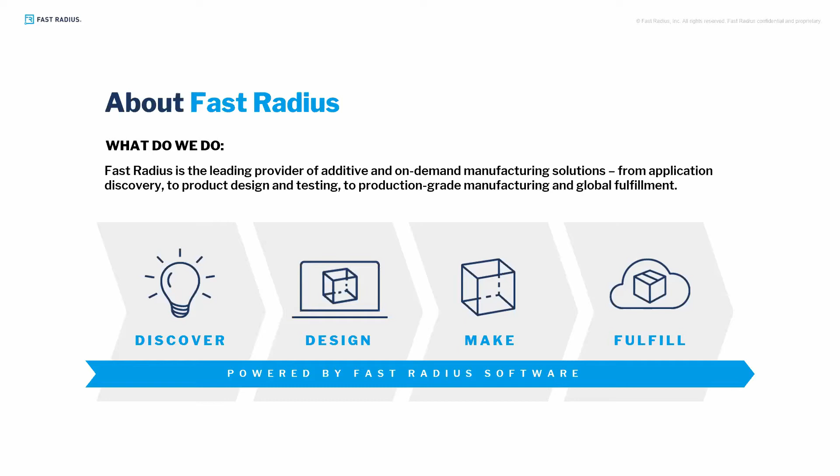So who is Fast Radius? Well, we're the leading provider of additive and on-demand manufacturing solutions, all the way from application discovery to product design and testing to production-grade manufacturing and global fulfillment. We're able to work across the product lifecycle, whether it's finding applications by working closely with companies in the discovery phase, to creating a robust fulfillment strategy that reduces waste and inefficiency.

So what does that really look like? Well, it can look like a couple different things. It can look like a one-stop manufacturing innovation solution provider that partners with an electric motorcycle company to find the right manufacturing solutions. That means finding the right process for each part in the BOM on a case-by-case basis and providing one solution that enables agility and speed.

It also looks like providing prototyping through full-scale production for a robotics company looking to develop a new product in half the amount of time as before and reducing their risk at launch. It also looks like completely rethinking existing supply chain fulfillment solutions to reduce costs, improve response time, and keep airplanes safe and in the air all around the world.

We're exceptionally proud of what we've been doing and building here at Fast Radius. In 2019, we were recognized as a World Economic Forum Lighthouse site, which honors companies and manufacturing firms that are implementing Industry 4.0 technologies. At Fast Radius, we're implementing end-to-end digital thread processes and the latest in technology and automation to create efficiencies and improve outcomes in manufacturing.

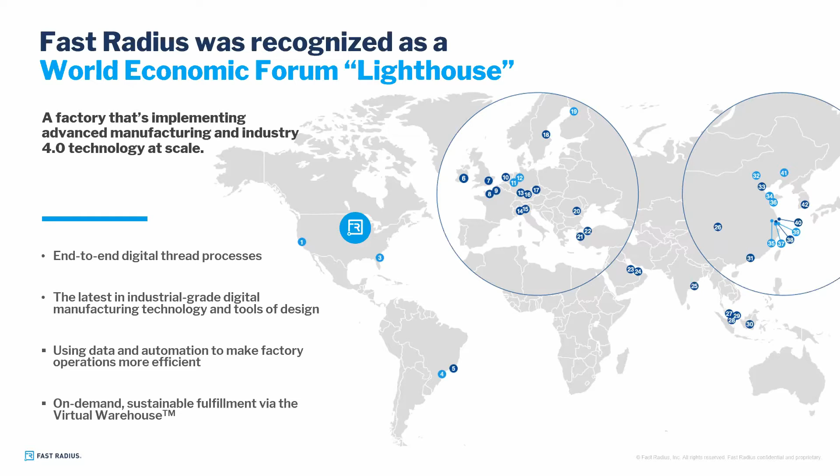Today, we support on-demand fulfillment solutions through our virtual warehouse, which enables our customers to reduce waste associated with warehousing and ensure supply is more perfectly matched to the demand when it appears. I'll give some more examples of that later on.

So let's transition a little bit away from talking about Fast Radius and really talk about the topic at hand, which is additive applications. When we're talking with companies about where to find the value of additive applications, we see four key archetypes. The first one is make the unmakeable. Second, mass personalization. Third, spare parts and supply chain. And fourth, low volume production. So let's talk about each of these a little bit.

So make the unmakeable. I think this is a common example for additive manufacturing. And the example we have here is the Adidas Futurecraft shoes. So creating new geometries that were previously impossible, very high complexity parts, maybe high performing parts, or even parts, in the case of Adidas, that grow their brand halo, something that helps convey the brand in the market.

The second one is mass personalization. Another really common use case for additive is, instead of creating large SKU segments of maybe 10,000, 100,000 units, creating smaller SKU segments, maybe in the thousands, and going after smaller segments of the market one at a time. I think an extreme case of that is actually single unit customization, where a product is created specifically for a user. The sources of value here are that you can actually create revenue uplifts by segmenting the market and then actually enhancing the customer experience.

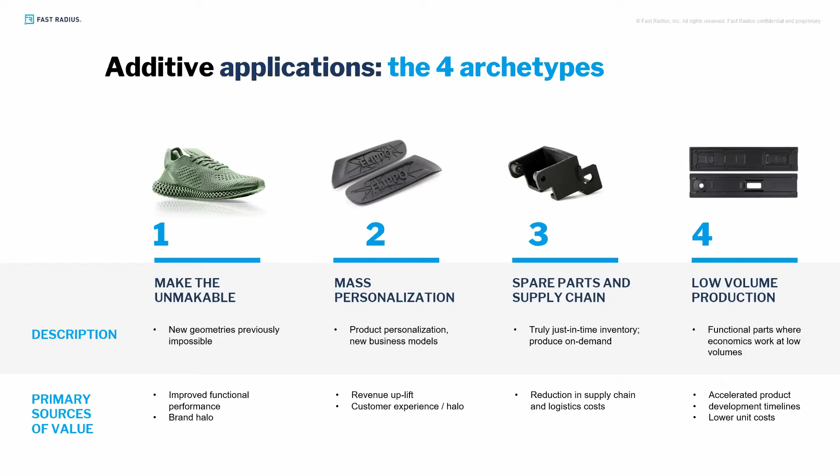So now that we understand the archetypes, how do we actually unlock the full potential of additive applications? How do we get the most value from these applications? So we actually see three main keys. The first one is understanding the economics.

Second is realize what's possible. And the third is embracing agility. So let's talk about key number one, understand the economics. So the first step to really unlocking the full potential of an application, it really starts with understanding the economics.

So additive can create much more value than a simple like-to-like part. And I think that's a big misconception, is that most people, when you look at the surface, making a part through additive, probably like-to-like, might be more expensive. But we actually describe the total value of moving to additive as something called the total value of additive, or TVA for short, which characterizes the value in relation to revenue increases and cost reductions.

So when we look at the revenue side, which is the top of this graph, we can create brand awareness with new and revolutionary products through brand halo, which I'd mentioned before with Adidas, is a really good example of that. We can also go after more of the market with incremental SKUs and even go to market faster in response to demand. Another category is increased functional improvements in which the customer is willing to pay.

For example, a $5 part through additive might increase the performance of a $1,000 system by about 10%. This allows the system to be sold at a premium. So that $5 part, yes, it may have gone from a $1 part to a $5 part, but you're actually increasing the value of the entire system through that particular part.

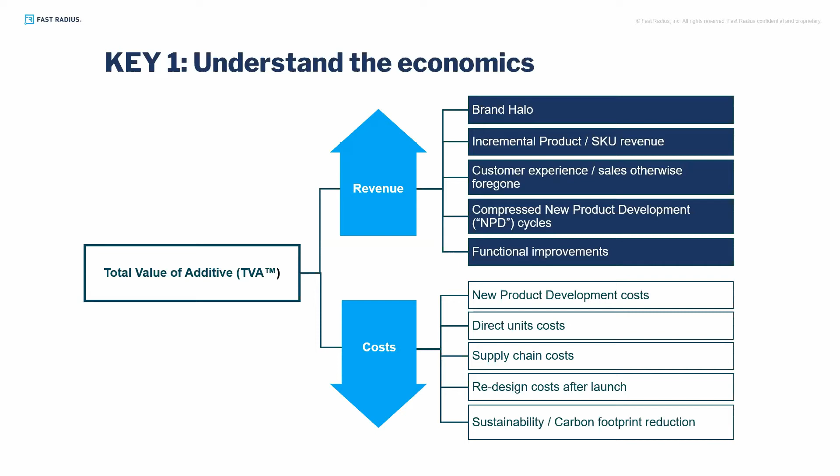As well as there are some cost reductions associated with sustainability and carbon footprint, where when we look at the differences between additive and subtractive manufacturing, there are cases with additive where you're actually using a lot less material. And so there's a lot less waste associated with that, which actually can reduce your costs. The reason this comes up as key number one is that in a business, if you're not driving value, it's very hard to get traction. And so it's really important that this is the first place you start when you're looking at applications.

Okay, so key number two, realize what's possible. So in some circles of additive, the term complexity for free comes up. And this term helps describe the trade-off between complexity and cost for a given manufacturing process. So in conventional processes, increasing complexity creates cost, where the additive curve is pretty flat.

And so a good way to think about this is I have a part with a lot of machine time associated with CNC. I think most engineers understand that the more time that it's going to sit on the mill, the more expensive that part might be. And so you might make trade-offs of your part of saying, I'm not going to add this extra complexity because it may not actually create more value in terms of the product, as well as their kind of competing effects.

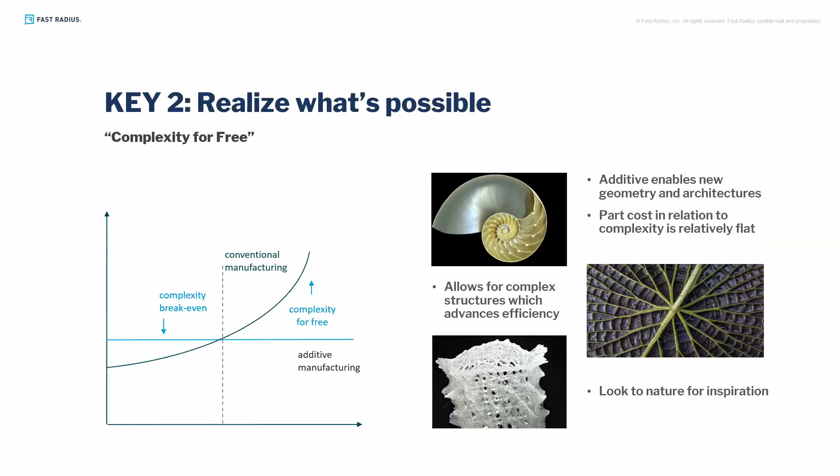And so related to this, if you look in the last 5 years, there's been a lot of advancement in the tool sets available to engineers, where additive manufacturing reduces a lot of the limitations of traditional manufacturing, like we just talked about, which allows these organic structures like lattices, which create these new aesthetics, which have the promise of new levels of mechanical efficiencies. The tools are not only built on the physical realization of the design, so it's the first time that we can really take these types of designs out of the virtual world and bring them into the physical world.

But the important thing to note is that the increasing computational power that's accessible to all of us makes these complex designs easy to manipulate. And so now you have software that can quickly converge on optimum solutions for different areas of the design space, where you get things that look like the parts that you see here.

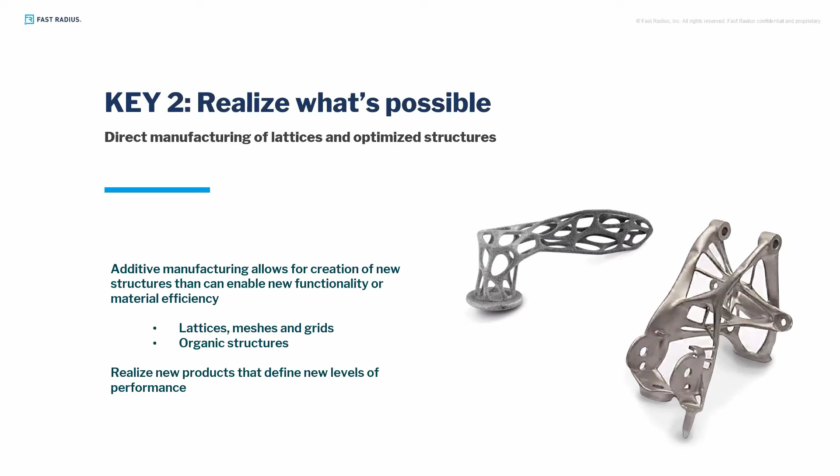And some of these may be more structured and visually or aesthetically driven. And some of these may be more structurally optimized. There are many different ways to talk about this family of design: lattices, meshes, grids, or maybe just organic, as I had mentioned before. The complexities of these designs have intent and purpose and can unlock new levels of performance.

So we talk a lot about the design, but another thing to note is that eventually we have to make these designs out of something. And so it's really important to note a big key has been advancing material sets. So wind back 10 years or more, and for additive manufacturing, there were probably only a few materials available. And really the key variable there was color. You could get the same part made in a couple different colors. And it was really driven towards aesthetic models, kind of non-functional.

When you look at today, there are materials that range from flight-ready Ultem materials to these soft elastomer materials that are biocompatible. There are also high-temperature plastics and cyanate ester, which is available through Carbon, which is designed for fluidic applications with really high operating temperatures. Or you could look at more structural materials like a PA12 glass bead, which is a nylon-based material that has glass particles filled in it to improve the strength and impact resistance, like a real filled composite.

And so these advancements in the material sets have a direct impact on the type of applications that engineers have access to. And a really good example of this are the EPU materials and silicone materials through Carbon. These soft materials, I think most people are used to the rigid materials, but the soft materials have opened up new dampening and energy dissipation applications by mixing the soft material response with things like lattices, which we just talked about. As more applications are found and adoption gains steam, you can expect these material sets to get better and more diverse over time.

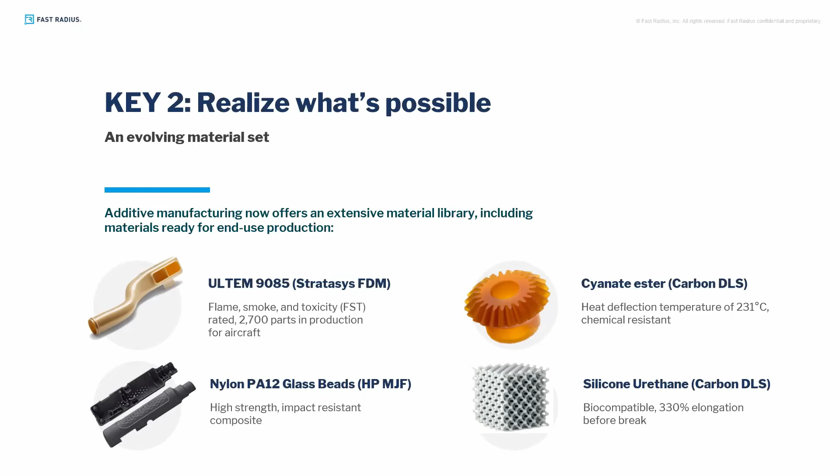The next ingredient is the advancement of computational tools, or digital tools more broadly. The increasing computational power has enabled two different things. First, large and really complex models can now be run in a reasonable amount of time. And the second one is that there are faster solve times associated with intermediate problems.

In these graphs, we show how a design can be optimized parametrically and through probing a design space to find the optimum design. In this case, it's a simplified design with a couple different features in it where we're going after rather aggressive mass savings with negligible change to the stiffness. And by using statistical tools with computational tools, we can probe the design space really quickly.

In this particular case, using physical samples where we could go to experimental testing relatively fast gave us a relationship to the physical world that was really important for calibrating the model. All of this is really grounded in our ability to access computational power where we can run hundreds of thousands of models in a very short period of time.

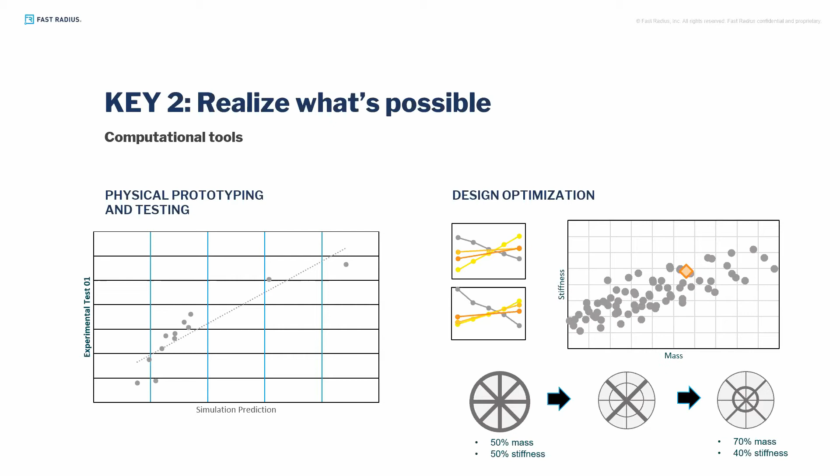There are also more specific computational tools that are available to engineers that are enabled through additive manufacturing. So the first example here is topology optimization, which changes the density of local regions in a part to reduce weight. A good example of this is the adidas Futurecraft 4D. Now, what you see here looks like a relatively uniform lattice, but if you were to cut this shoe open, what you would see is that the lattice is functionally very different, and design-wise very different, in different areas of the foot. And so the question is, why is that?

Well, we have different pressure profiles on our feet individually, but also in different areas of the feet. So the heel of our feet hit very differently than the front of our feet. And so the structure of the lattice accounts for that.

There's another example here on the slide that shows some work we have done where you can use things like topology optimization, which is essentially like optimizing the density of your system to account for loads. In this case, this is an example of a bike seat where we're putting a pressure load associated with how someone might sit on the seat, and then relating that to the structure that is eventually printed. Topology optimization is usually used to reduce weight. You're usually starting with a solid model and kind of working towards reducing weight.

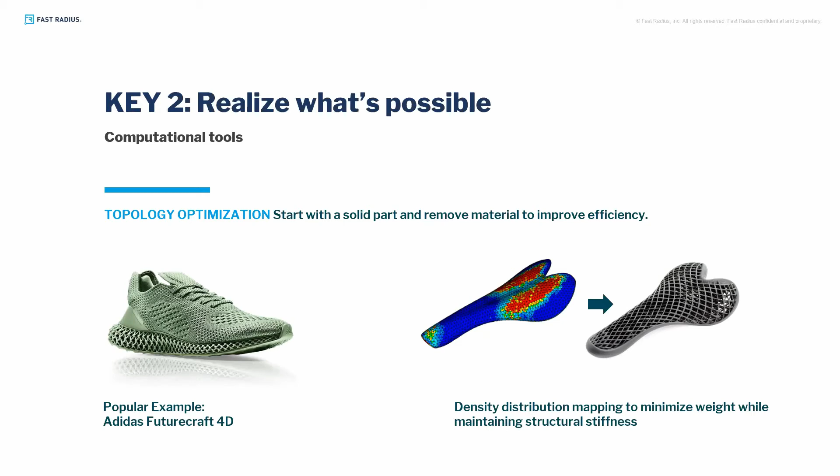A second tool, which is very similar to that, is called generative design, which Autodesk has as a part of their Fusion 360 platform. So if topology optimization starts with a solid part and tries to remove material, generative design starts with no part and adds material as it's needed. Both of these schemes use simple structural finite element codes at their core and build optimization schemes around them. They're just starting from different endpoints.

So if you're a design engineer, it's okay, breathe easy. It's not going to replace you anytime soon. These tools are useful, but like other tool sets, they're most useful when they're used to inform the design, not necessarily build it all the way. And what I mean by that is it still takes a designer to get the problem set up properly. It still takes a designer to make sure your part will fit in terms of a system or assembly. And it will still take a design engineer to make sure the part meets all the requirements and testing. And so this is a very complementary tool within the toolbox for engineers.

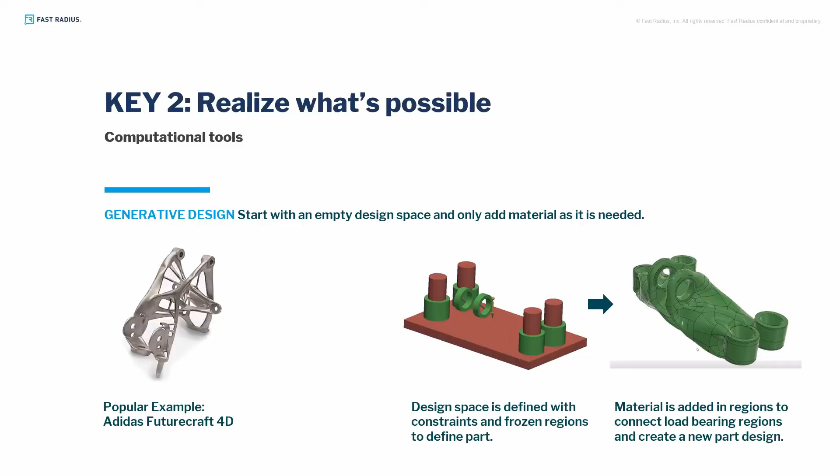And so the interesting thing is that these lattices and structures have a new aesthetic and kind of a new product semantics that customers are not familiar with just yet. The parts are alluring because they look so different. They're almost radical in the way they look because they challenge what we think we know about how to design a part. This actually provides a great opportunity for consumers to have different experiences with their products unlike they have before. In some of these images with varying lattices, the variation is specifically designed for performance and efficiency, but also has almost an artistic look to it. That is intentional too.

And so it challenges the way that we might design products in some aspects, but it can also be part of a holistic design approach where the consumer experience sits at the center of the design, where it's about function and look all at the same time. And so computational tools and optimized designs don't always look like complex structures. It can also be radical in its simplicity.

So Arevo is a manufacturer of 3D printers that are essentially, you can think of them like FDM print nozzles on 5-axis robots. The process, which is fairly similar to metal DED, extrudes a plastic with a continuous carbon fiber throughout it. So this process allows for direct manufacturing of really complex shapes, but also specific orientations of fibers to the loading direction. So it means that you can create incredible efficiencies that you couldn't get before just through laying up composites.

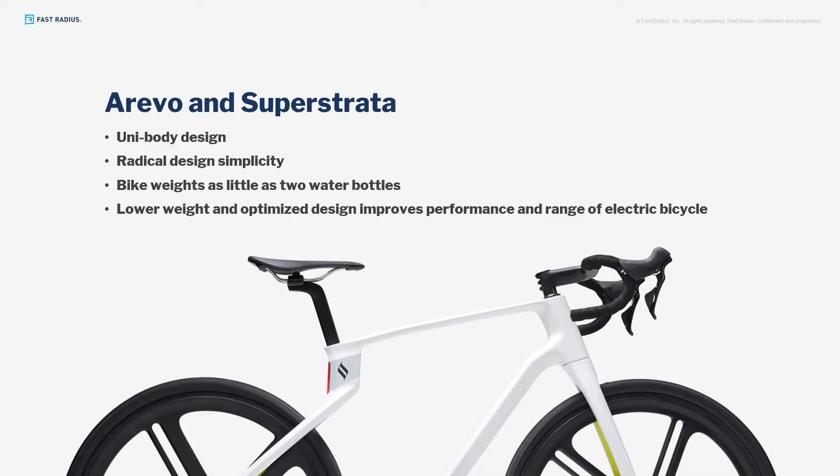Which could require very large computational models to get it right. In the case of Arevo, the result is a bike that weighs only slightly more than the water bottle used to rehydrate the person riding it, which is pretty amazing. In this particular application, the weight savings actually enables new functionality where there are longer ranges for the electric motor and basically enables like a new way of transportation that many people before considered quite limited.

The last thing here to realize is that parts are not always in a finished state coming off the printer or out of the manufacturing process. Post-processing and cosmetics have come a long way to extend the use of parts from additive technologies. In this case, some of these examples are painted or plated samples, where plating can be used to give a specific look, or it could be used to get rather specific wear, electrical, or thermal properties, so functional properties.

Over time, people have learned how to secondarily post-process these materials, as they have with conventional processes, to extend into different industries, whether it be for electrical connectors or for like luxury consumer goods. So the last key here is embracing agility. Some people might be confused about why we're talking about agile product development when we're here talking about making physical parts and manufacturing. These terms are usually not synonymous with each other.

And so agile product development has been particularly popular in the software world because engineers can deploy new products almost every day with new revisions and new releases. This means that they first focus on MVP and then incrementally update and change as needed, where getting that first MVP out is really important to hearing back from your customers how they're using the product. With additive manufacturing, we can make new parts every week, every day, or maybe even every hour. So we can adopt some of these principles to help us work more efficiently.

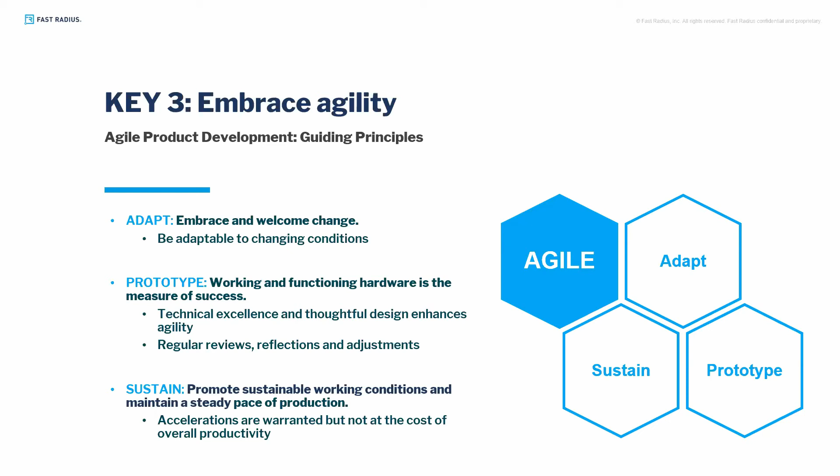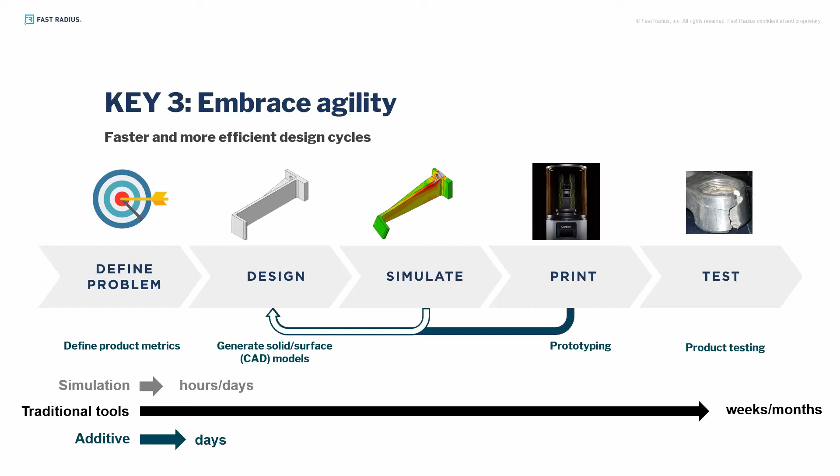With additive manufacturing, it actually provides a second feedback loop. So if the first feedback loop is simulation, that we can feed back to the design, with additive we have a physical feedback loop with prototyping that we can use. So instead of weeks, we can get parts back in days. This is pretty powerful for design projects where now with simulation and additive, I can sample from the virtual and physical world as I design. This not only allows me to reduce time and capital costs, but also helps me get better designs.

Which doesn't look very great, but it did highlight something that was really important to us, and that was we moved pretty fast. We kicked off our project, and in the first month, we proved feasibility. And it was actually so fast that the business was not ready for that to happen. And so it took a little time to get the right stakeholders aligned to move the project forward. And so that's an important call out of agile product development, is to make sure that all the stakeholders are involved from the beginning to ensure that you can really take advantage of the velocity that you're driving.

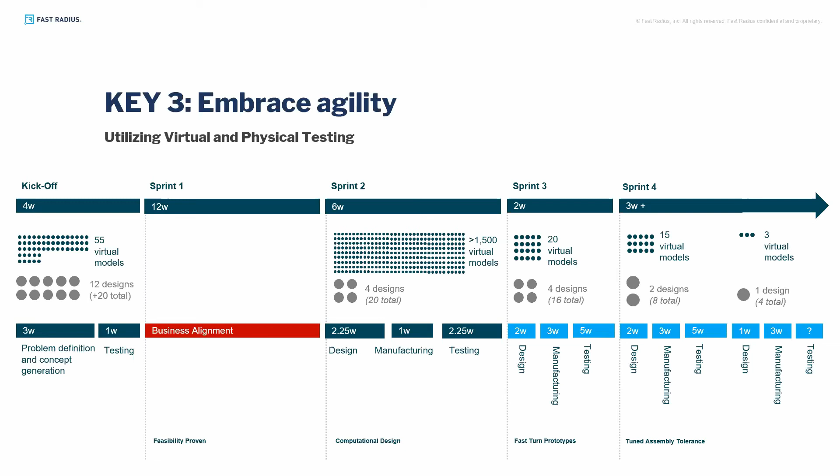Subsequently, after that delay, work continued, and you could see that there was honing in the design where we went to actually more virtual models. We explored more of the design space to get more certainty about where we were, and then began to dial in our design through more testing and supporting simulation work.

So putting it all together. So we have these 3 keys. What does this look like when you put all of it together? So here are a series of case studies that highlight some of these points. So the first case study are the COVID diagnostic swabs.

So back in March, if everybody can rewind to many months ago, there was a shortage of swabs that was identified as a critical item in the supply chain as testing was starting to ramp up. Traditional swabs for testing primarily came from 2 places in the world and had very long lead times associated with them. It was a supply chain that was not set up to move very quickly.

And so Carbon and Resolution Medical partnered together to design and test a new swab design in less than 6 weeks. So using additive manufacturing, driving incredible velocity in development by listening and watching for an opportunity that posed itself as a shortage in the market. So this extremely short time to market was enabled through an agile development process with daily manufacturing runs to send samples to testing, get approval, and eventually dial in the production process.

The end result has been a design that early tests suggest performs almost as well as traditional swabs and might lead to fewer false negatives. We're extremely happy to partner with Carbon and Resolution to manufacture these swabs and help address some of that shortage. And so this is a continued thing where these swab designs can change relatively rapidly to new tests that may be developed or new requirements that may come in from regulators.

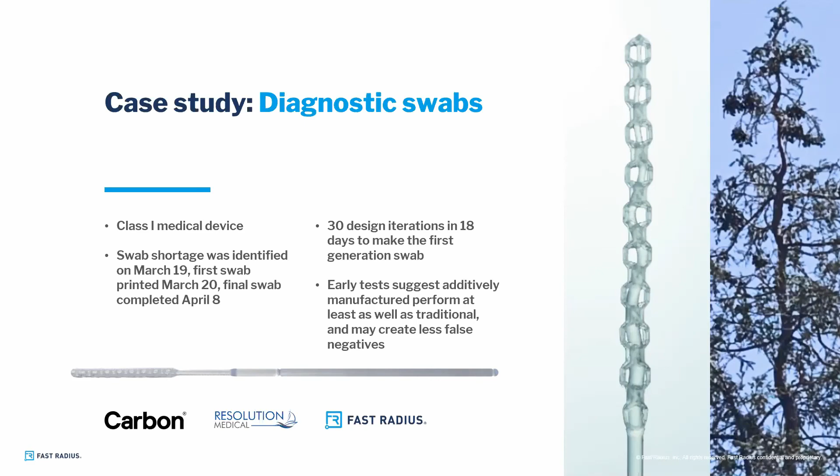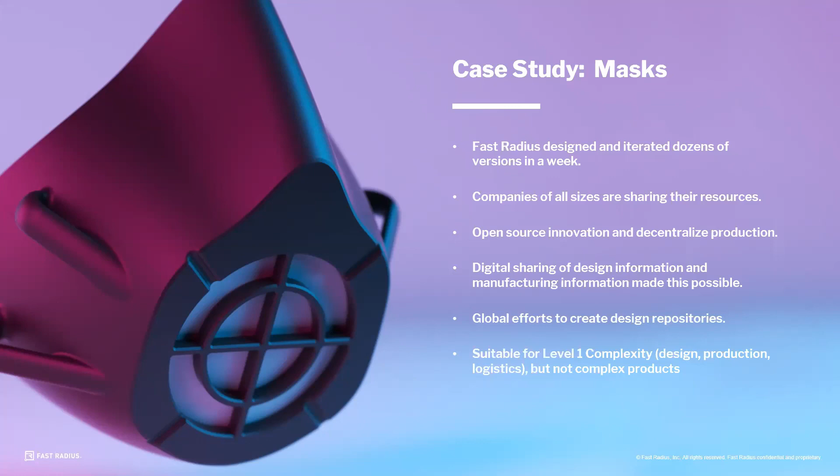So thousands of companies, big and small, have contributed to this effort, where around the world people have shared designs, lessons, and resources, and we're proud to be part of that. So open source innovation and decentralized production, where people can make these masks at home, was kind of the play here, where there's digital sharing of design information and manufacturing information that made that possible. So not a real manufacturing solution, but a win in terms of the design where people were able to move relatively quickly.

So there's been this global effort to create design repositories where there's this new idea of how do we respond to future crises or supply shortages. The World Economic Forum, National Institutes of Health, and the World Health Organization, amongst many others, are looking at these problems.

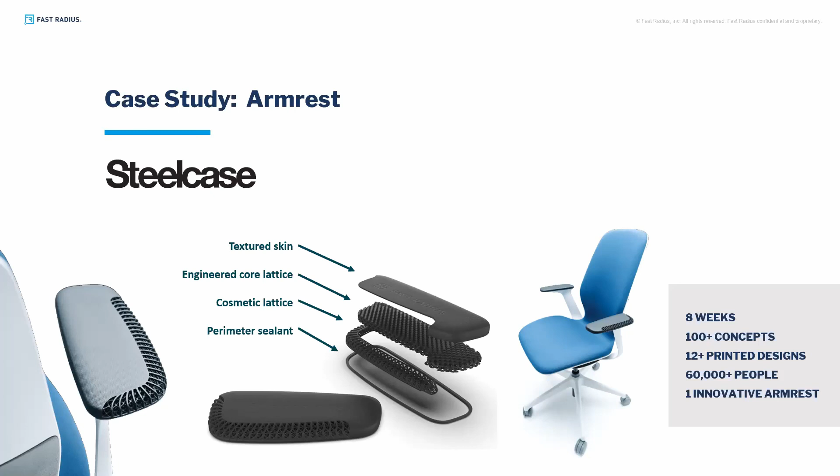So a really good example of rapidly developing a product by using complexity of design to create kind of an elegant solution to an assembly. Kind of coming back to another COVID-related application, and a recent one for us, is our development in the face shield market. So rather quickly, back in the spring, we were able to adjust our internal production and develop our own face shield halo. This product incorporates a halo that is additively manufactured, as well as a couple other components purchased

off the shelf. The solutions only took days to ramp, with development concentrated over a short period of time, where it took only days to ramp production instead of weeks for conventional processes. So far, we sold over 100,000 shields and are responding to that growing demand. We've also used that work to spark other collaborative projects where we develop products to solve very explicit problems

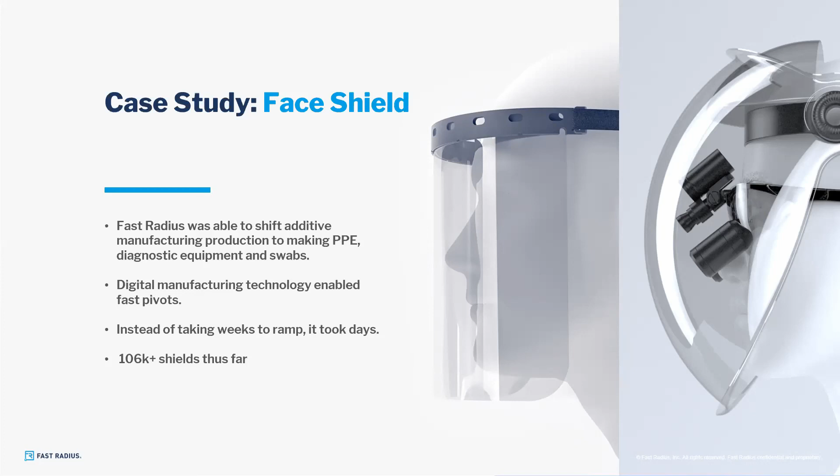like loupes for dentists. Although most of the production has shifted to mass manufacturing processes over a period of time, like to injection molding as the demand has gotten really high, additive was used to develop the product and really create a bridge to reaching those larger demands. So it was really important to us in terms of how fast we were able to respond and how we were able to build up to the larger volumes.

And then over the life of the program, which was still relatively short, they saw more opportunities, which resulted in a final BOM which was over 50% additive. So a really great example of starting at one place and kind of seeing how it catches. And they were able to see a lot of value on this particular project.

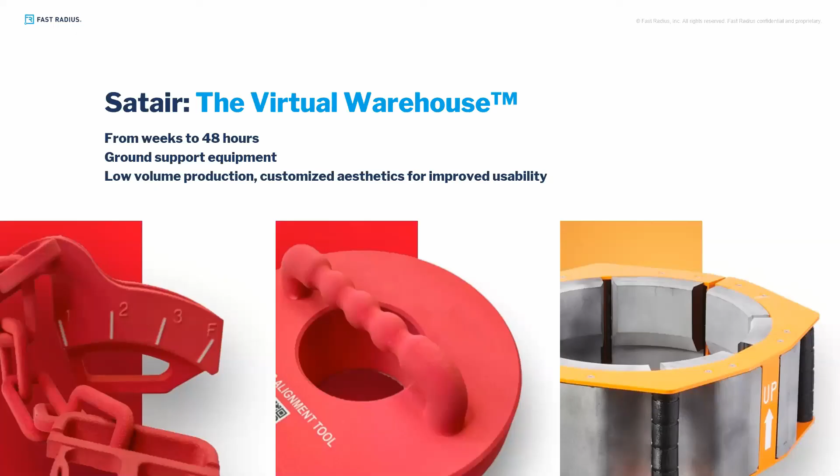The last example I want to talk about is our work with Satair. So Satair provides the ground support for Airbus aircraft around the world. We often think about the parts that actually fly when we think about the aerospace industry, but there are a lot of parts that are critical to operation that never leave the ground. These support equipment parts need to be on site and ready for use when they're needed, but oftentimes are only in quantities of 1 to 2 at a time. They're highly customized parts that are difficult to source in inventory. Therefore, they worked with us to convert some of those to additive.

This has significantly reduced their lead time from weeks to days, as well as reduced the safety stock of the tools. As an added benefit, we're able to customize the aesthetics of the parts to improve their use. You can see some of the examples here on the screen, whether it's embedded labeling, QR codes for specific call-outs of operational processes or part numbers, or even guides to ensure the part is being used correctly. This initiative with Satair has been part of a larger partnership where we continually find new ways to find the full potential of additive applications.